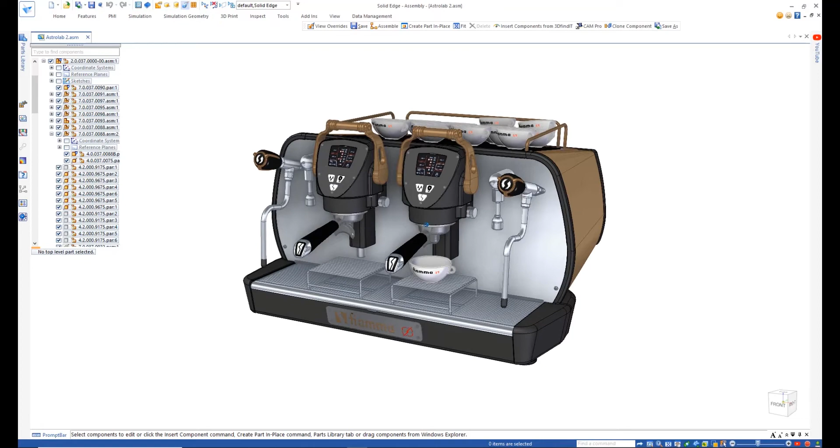Transform your manufacturing and maximize your design data with the powerful automated tools of Solid Edge's fully integrated CAD/CAM solutions. With Solid Edge CAM Pro 2.5 axis now included with every Solid Edge license, let's explore the powerful yet easy-to-use tools with this espresso machine as our example.

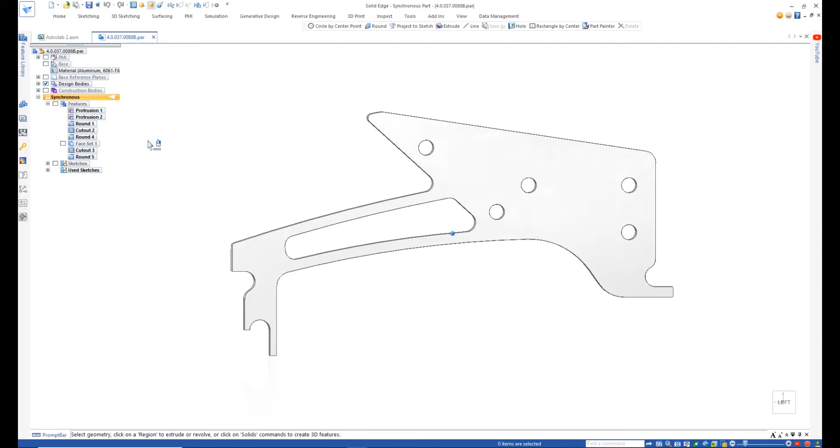We'll leverage Solid Edge CAM Pro to create the manufacturing toolpaths for the machine's rear legs. First, we'll use the Solid Edge assembly tools to create the shape to represent the stock part, and also the parts that form the fixture assembly, which include the standoff plate we see here as we add additional fixing holes from the standard database. We'll also make use of the vast supplier catalogs from 3DfindIt to get an appropriate socket head cap screw.

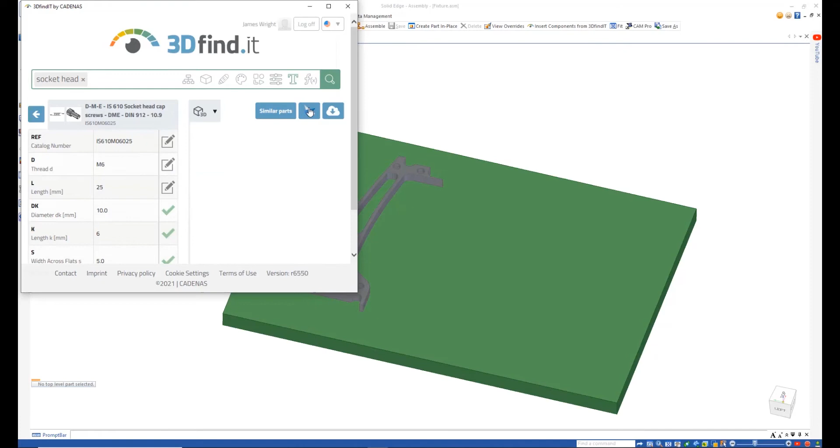You can see here Solid Edge is a great CAD for CAM tool, but also that Solid Edge CAM Pro solutions handle assemblies as well as single parts, which is very important when creating toolpaths and making sure to avoid collisions with the fixture components.

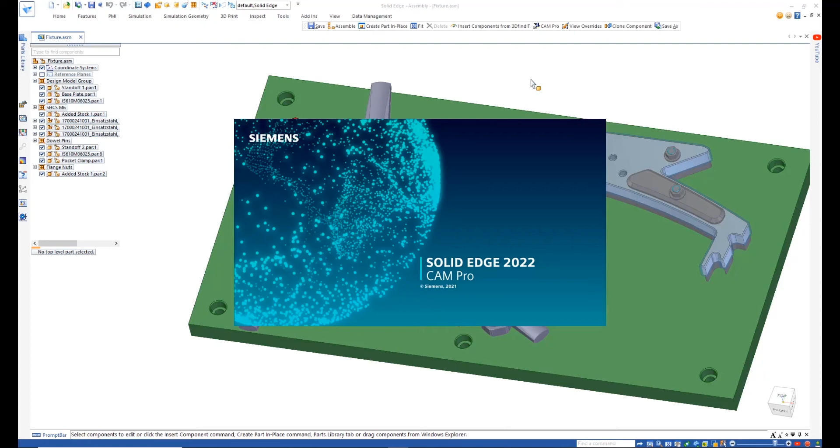We'll machine this design in two setups. Step 1 is to mill the pocket and drill the holes, and Step 2 is to machine the profile. One click sends the entire assembly to Solid Edge CAM Pro. Associativity is maintained to the complete assembly, so if there are any last-minute changes, you can quickly accept them and continue the NC programming process.

New for Solid Edge CAM Pro is the ability to create adaptive roughing toolpaths for 2.5 axis operations, included at no additional cost. These are faster than traditional toolpaths and extend the life of the cutting tools.

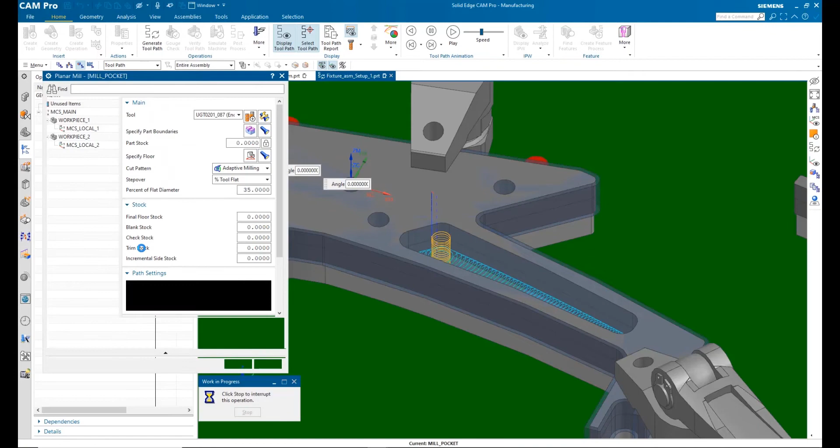Solid Edge CAM Pro also has great visual tools to build your confidence. Here we're using toolpath animation with material removal to see the cutting effect. Built-in productivity tools like right mouse button context menus allow a user to sail through the NC programming process.

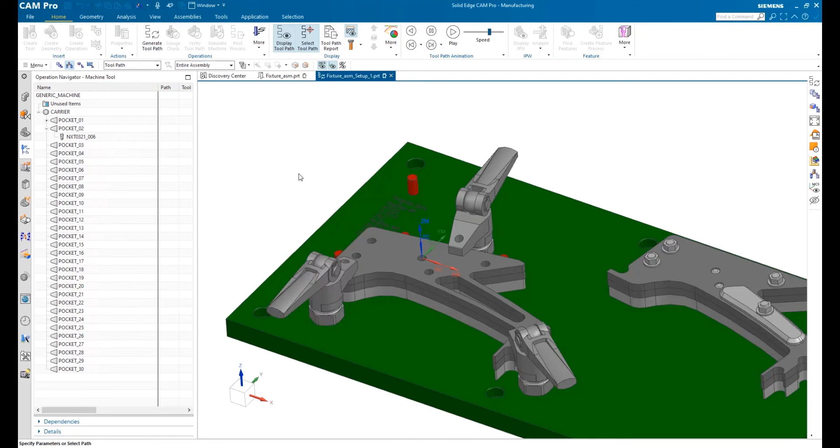Here we'll create a spot drilling operation for the 5 holes in the support. Notice the graphical pop-up hints that help us with operation selection. Graphical helps are also available in geometry selection.

Each time we select a hole, we get a preview of the machining that will take place. At any point in the process, we can get visual feedback on our decisions. Now that our CNC program is complete, let's run the whole thing through visualization before processing.

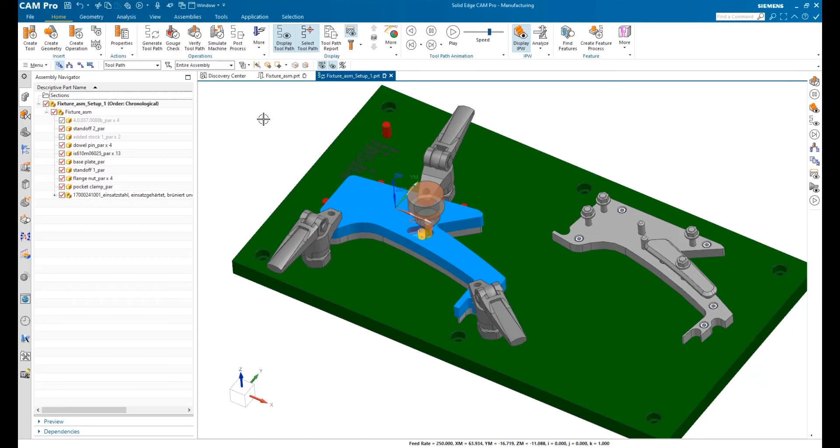Pocketing, profiling, and hole making, Solid Edge CAM Pro can do all that and much more.

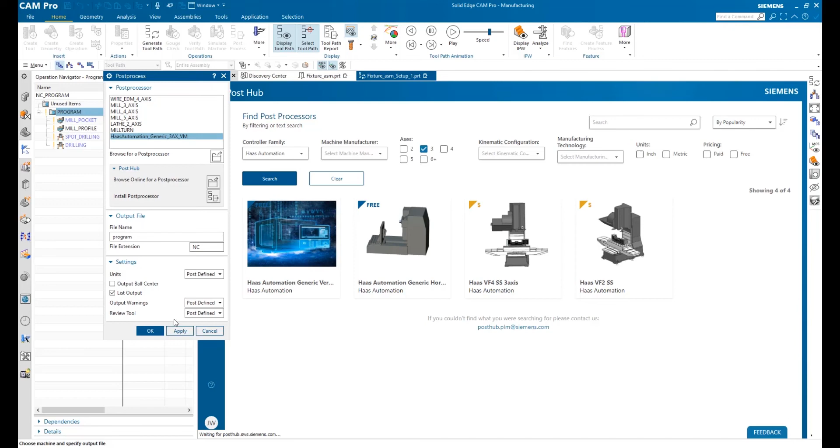No CNC job is finished until it has been post-processed for a specific machine. That's where PostHub, an online database of over 1,200 post-processors, really shines. You can filter using several different criteria to find exactly the one you need. PostHub is also constantly being updated with new posts.

Solid Edge CAM Pro 2.5 axis, now included with every Solid Edge license, allows you to transform your manufacturing and maximize your design data.